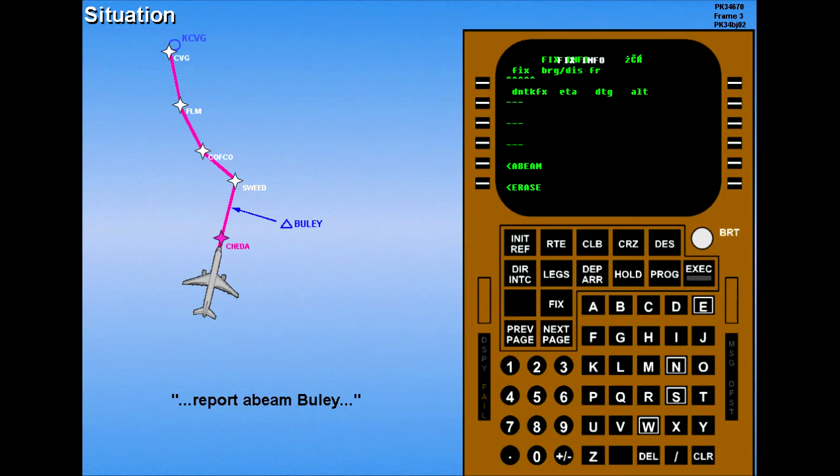First, enter the reference identifier into the box prompts. Your bearing and distance from Buley is now shown.

Next, select the abeam prompt. Now displayed is the radial and distance from Buley to the abeam point along your flight path. Also displayed is the estimated time of arrival, the distance to go, and the computed altitude at the abeam point.

Note that the HSI has changed the reference waypoint symbol and has added a dashed green reference line representing the abeam radial.

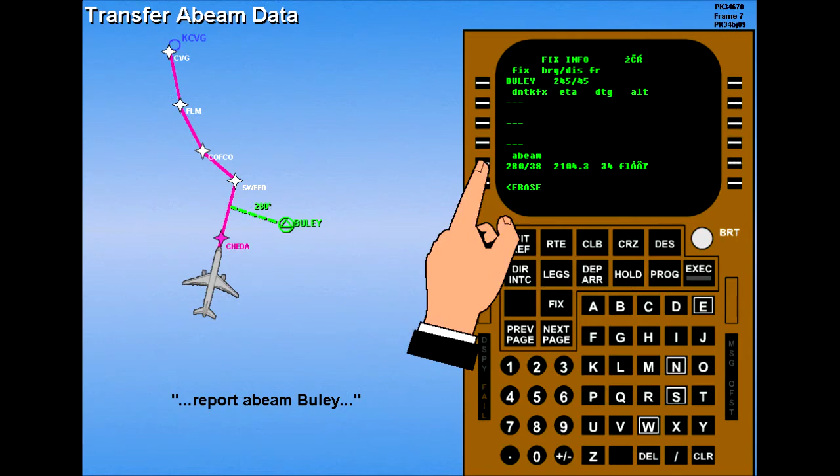To convert the abeam data into a waypoint, first select it to the scratch pad. The scratch pad now displays the selected identifier along with the computed radial and distance to the abeam point.

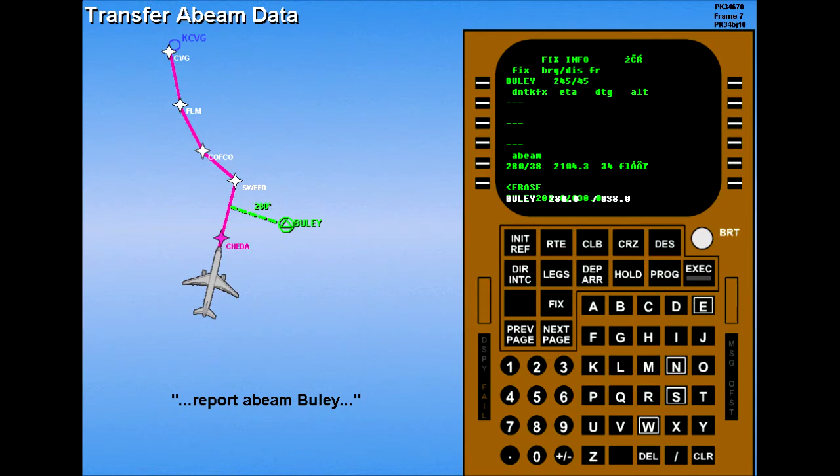Next, select the legs page. The abeam data has now transferred to the legs page, and using the HSI for reference, can be line selected into the proper route sequence.

The new waypoint is labeled using the reference identifier and a number showing how many waypoints have been created on this route.

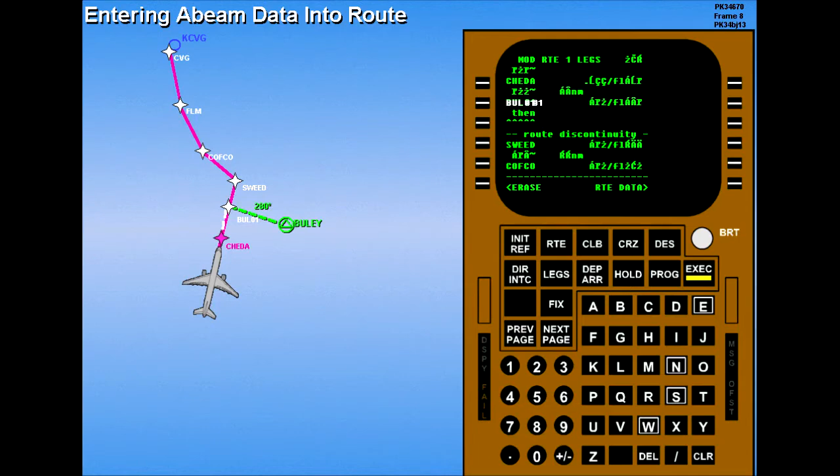After solving any discontinuities and verifying the modified route, it may be executed.

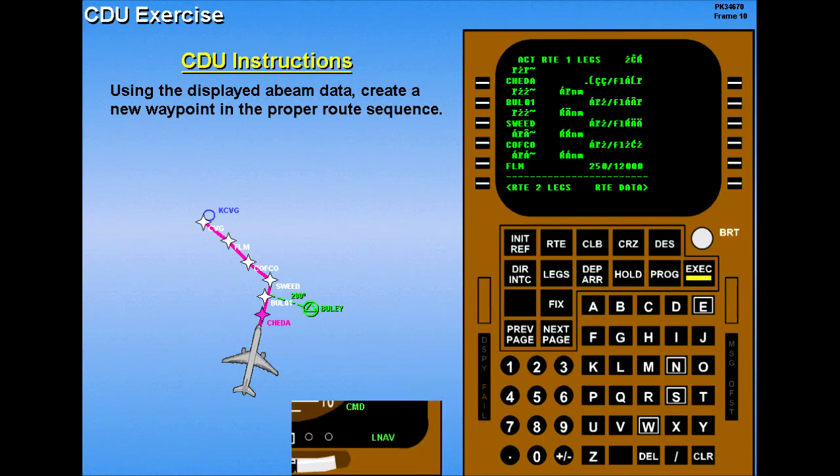Should a specific crossing radial other than the abeam be requested, enter it into the scratch pad, then select it to the downtrack fix line. Data will now be displayed reflecting the entered radial.

Now let's try another problem.

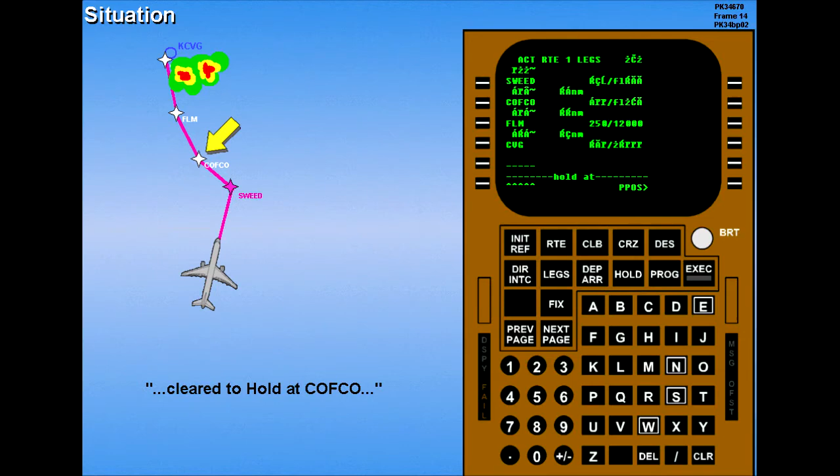To set up a waypoint holding pattern in the FMS when no other hold is active, first select the hold key to display the hold at page.

Next, enter the holding waypoint, COFCO, in the scratch pad, and then line select the hold at box prompts. This will display the modified hold page and the pattern for standard holding at COFCO.

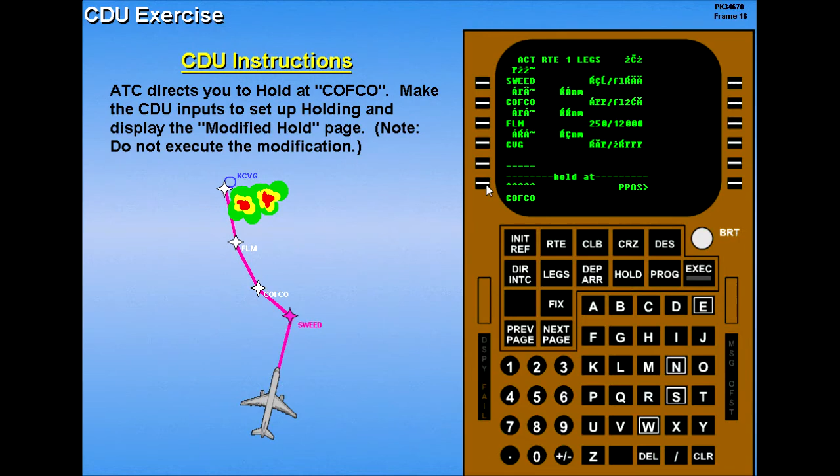Both the HSI and the modified hold page depict data for a standard holding pattern, with right turns and 1.5 minute legs.

The standard inbound course and target altitude are FMS computed figures from the legs page. The FMS also calculates a target speed, which is the best holding speed up to flight level 310, based on gross weight and other performance factors.

Any non-standard holding instructions must be entered manually to update the modified hold page. For example, assume that your clearance includes non-standard holding instructions.

To update the page with the clearance, enter each block of non-standard holding data in its respective line. For lesson purposes, we will update all appropriate data on this page first, before executing the modification.

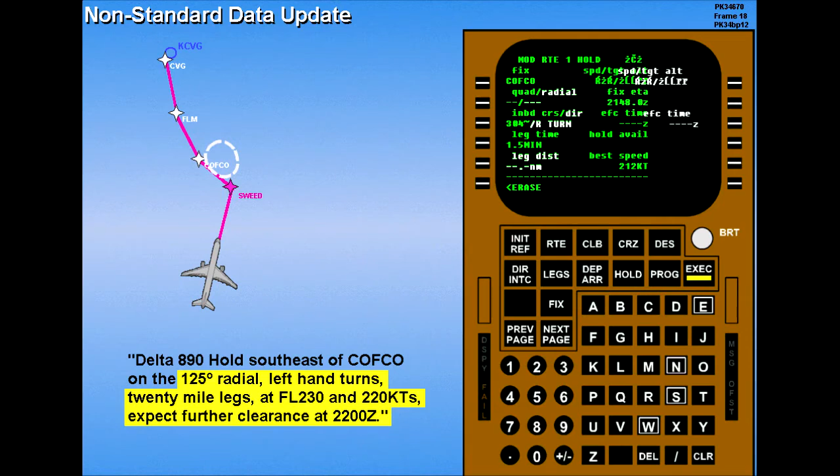Starting on the left side of the page, when a new radial is entered, the quadrant and the inbound course will update automatically.

To command left-hand turns, enter the letter L in the direction line. Whenever a leg distance is entered, it will override the previous leg time display.

Now try a partial exercise.

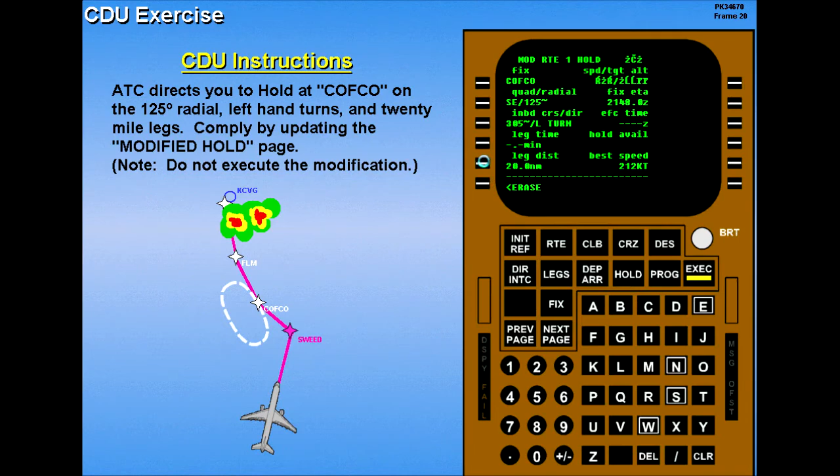To update the right side of the page, first enter the new holding speed and altitude over the computed figures. Next, if desired, enter the expect further clearance time.

When an EFC time is entered, the fix ETA will update and display a new estimated time of arrival at the holding fix following the EFC time.

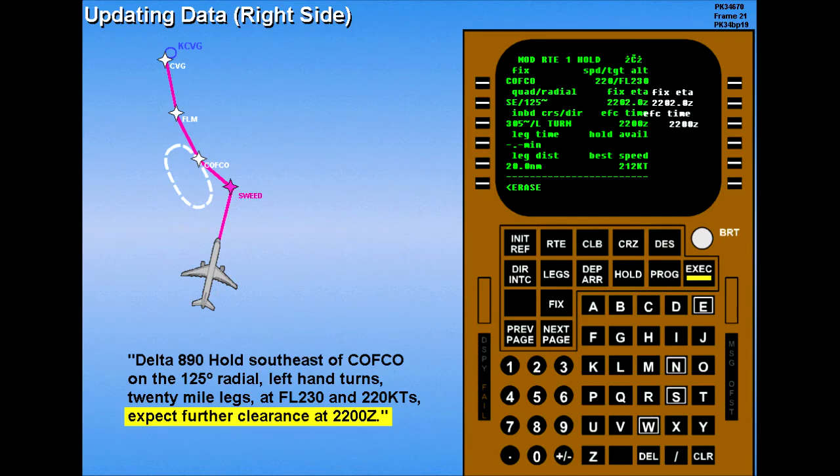Finally, execute the modification to implement and display the new holding pattern.

As a technique, the execute key may be pressed when illuminated after each data field entry, to prevent possible loss of all entries in the event of erasing in error.

When displayed, the hold available line indicates the holding time available before affecting the destination fuel reserves entered on the performance page. Now try a complete exercise.

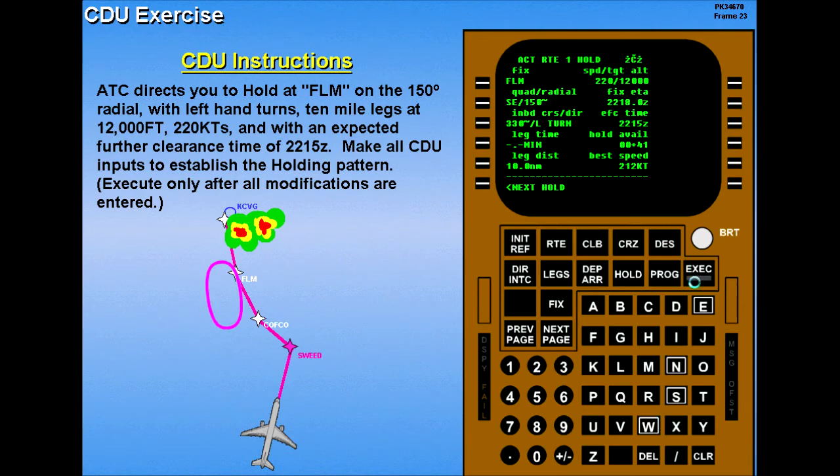After establishing a waypoint holding pattern, select the legs page and verify that there are 2 leg lines displayed for that particular waypoint.

The first line shows the waypoint that you are flying to and its associated flight plan figures as previously computed. The second line displays the waypoint fix that you will be holding at and its associated figures as programmed on the hold page. Now let's look at present position holding.

Let's assume that due to en route weather, ATC directs you to hold at the aircraft's present position. To set up a present position holding pattern, first select the hold page, and then line select the present position prompt. This will display the modified hold page and the pattern for standard holding at a present position waypoint. In this example, waypoint 3.

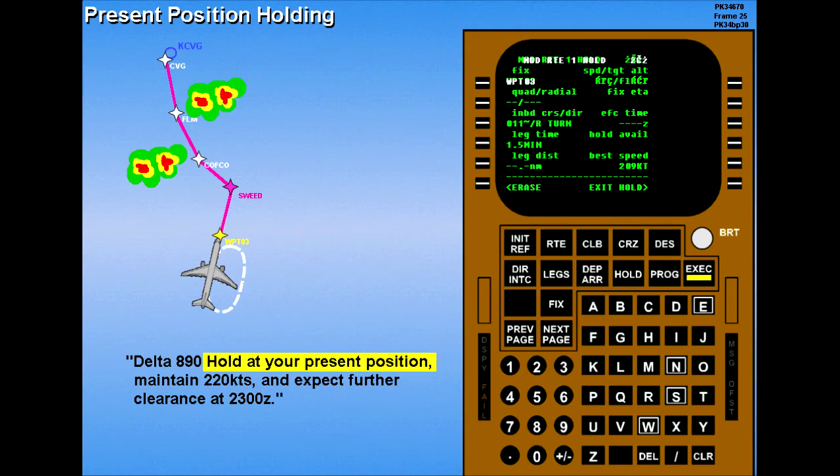Changes to the standard data may be made, such as a new airspeed and the expect further clearance time. Then, when the modification is executed, the FMS will fix the active holding pattern at that point and command a turn into the pattern.

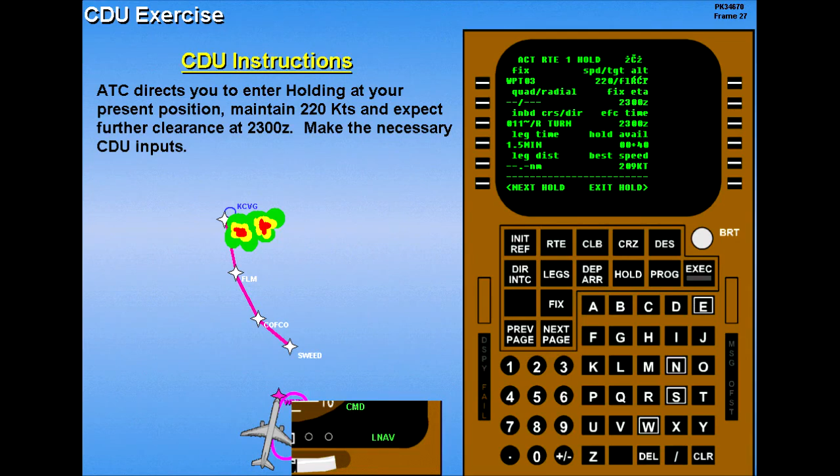Now for some words of wisdom concerning holding, winds and LNAV. When arriving at a holding fix, if winds are excessive, consider disengaging LNAV and using the heading select mode to adjust the bank angle. Following entry, if it can be reasonably assured the displayed holding pattern will not exceed protected airspace, use of LNAV may be resumed.

After entering holding, the exit hold prompt will be displayed. Any further modifications made to the holding pattern after entry will only become effective on the next crossing of the fix. Now try some questions.

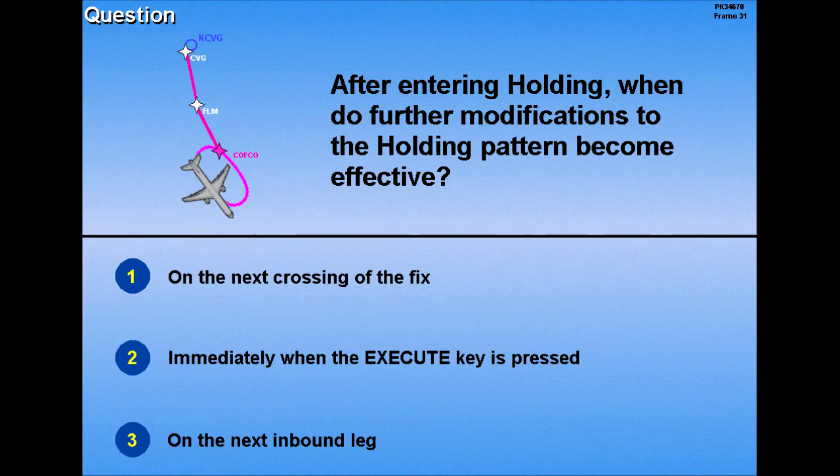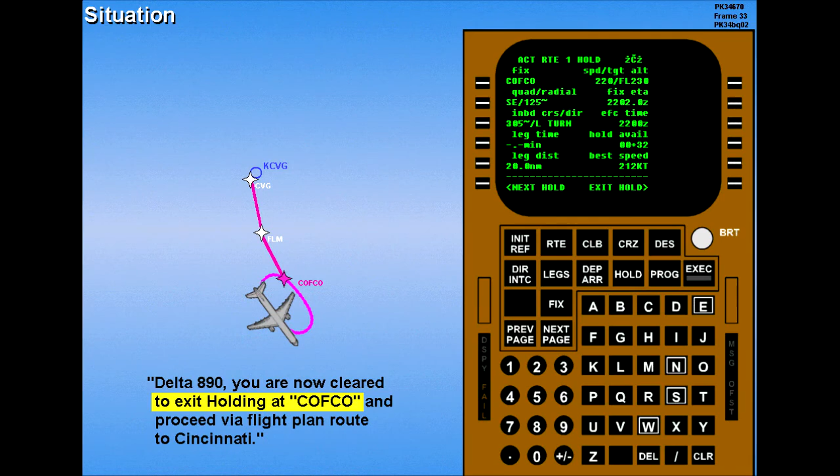You may exit a holding pattern by either of 2 methods. The first uses the exit hold function. To exit using this feature, after selecting the hold page, line select the Exit Hold prompt and observe that the line prompt changes to an Exit Armed label.

When the modification is executed, the aircraft will immediately proceed back to the holding fix, terminate the pattern, and continue along the planned routing.

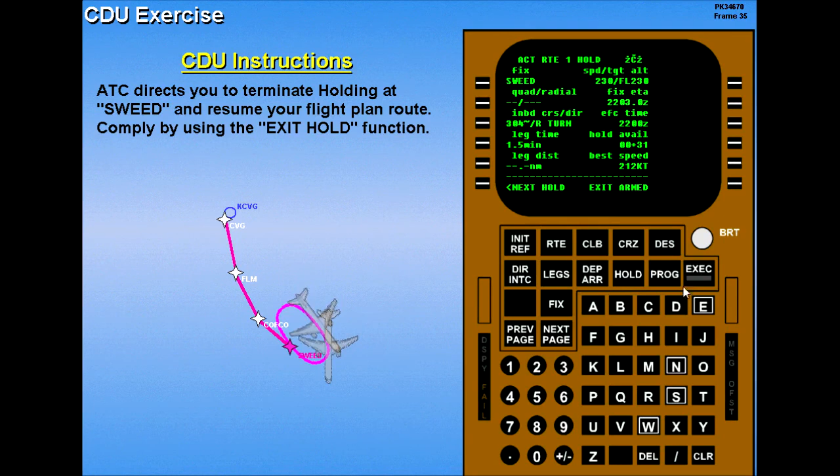The second method of exiting a holding pattern utilizes the direct intercept page and can be used whenever ATC clears you to another fix or leg directly from your position in holding.

For example, you are holding at COFCO when ATC clears you to proceed present position direct to Falmouth, then flight plan route.

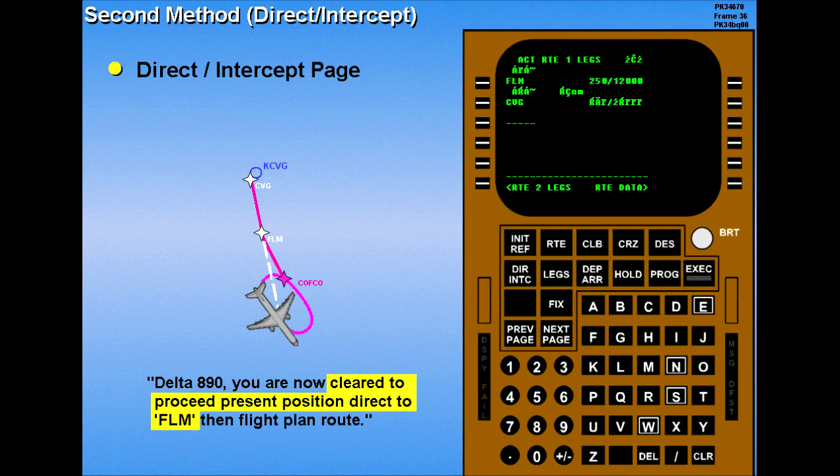After the direct intercept page is selected, properly modified, and then executed, the FMS will terminate the holding pattern and turn the aircraft to a course direct from your present position to Falmouth.

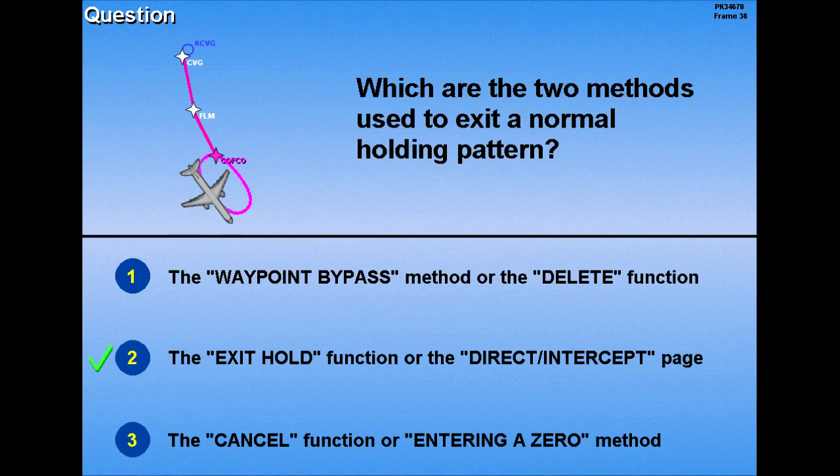In this situation, you are descending on the SWEED 2 arrival and, under ATC direction, have established a holding pattern at Falmouth.

ATC now clears you to cancel the hold at Falmouth and continue your flight plan route. Prior to the aircraft entering a holding pattern, you may cancel the hold by either of two methods.

The first uses the waypoint bypass procedure. To begin, first select the legs page and notice the position of the holding fix line. Next, perform a waypoint bypass to remove the holding fix. In this case, line select Cincinnati over the Falmouth hold at line.

Then, when the modification is executed, the holding pattern will cancel.

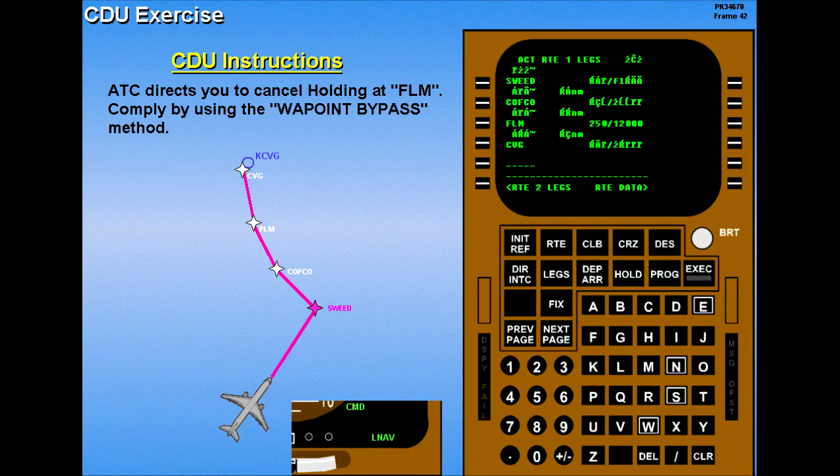The second method of canceling a holding pattern prior to the aircraft's entry is by use of the delete function. First, select the legs page and identify the holding fix line. Next, use the delete function to remove the hold at line. Then execute the modification and the holding pattern will cancel.

Now let's try another exercise and a question.